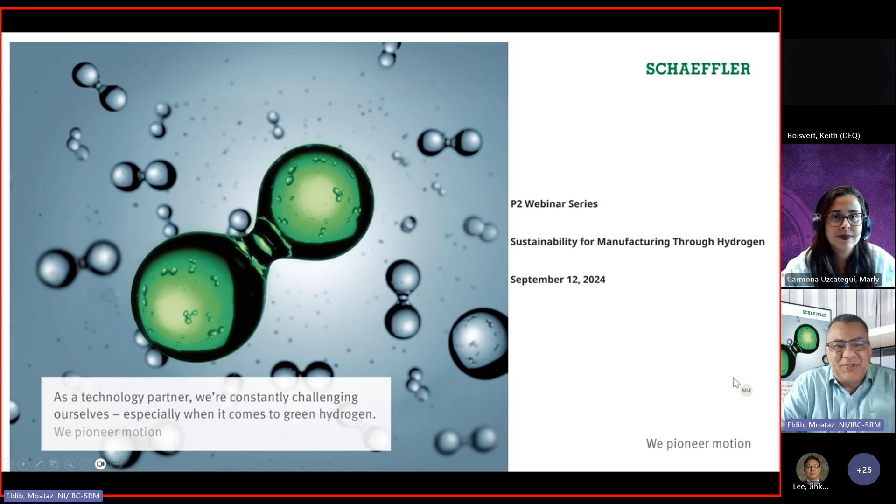All right. Yeah, thank you for the introduction and the opportunity to present. So I'll get right into the presentation. We'll start with a little bit of an overview of Schaeffler and then look at specifically electrolyzer technology, as well as the hydrogen market and federal policy, and then pathways to sustainability, along with maybe three example projects that can prompt discussions and give you some ideas on how hydrogen can be implemented in manufacturing operations to reach sustainability goals, along with some recommendations and high-level suggestions on engaging in projects.

So to start, Schaeffler is a global company that's been in business for over 75 years, headquartered in Germany, and our product lines are in automotive and industrial components. We've got over 83,000 employees worldwide with locations around the world, including our industrial headquarters in Fort Mill, South Carolina, and our automotive division in Wooster, Ohio. Our products are in just about everything that moves. Mobility is the core element of the product lines, from on-road and off-road vehicles to aerospace to the wind energy segment. Our products are present in many different applications.

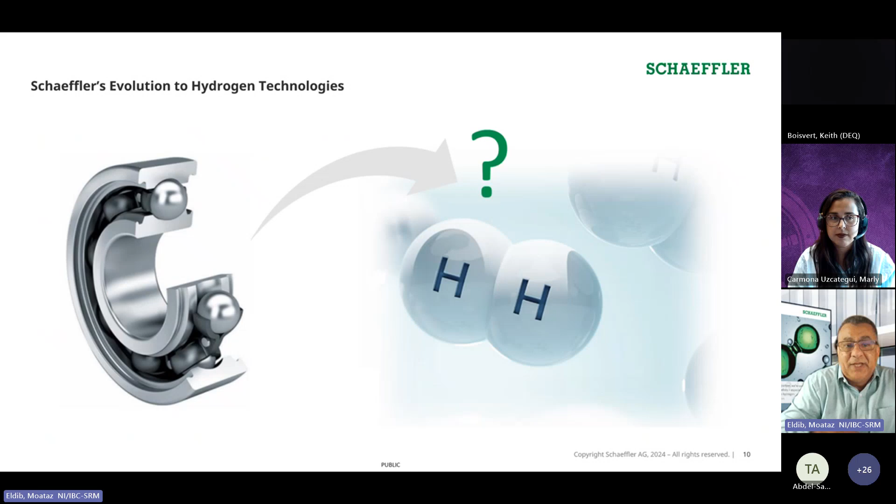So if you're not familiar with Schaeffler, or if you are, Schaeffler is a bearing company. So how does a bearing industrial and automotive company get into hydrogen technologies? Well, as I said, motion is our connecting element between our product lines. Whether it's guiding motion, driving, energizing and sustaining motion, our product lines are organized in a way that we can build upon our core competencies and our expertise to create valuable solutions for our customers.

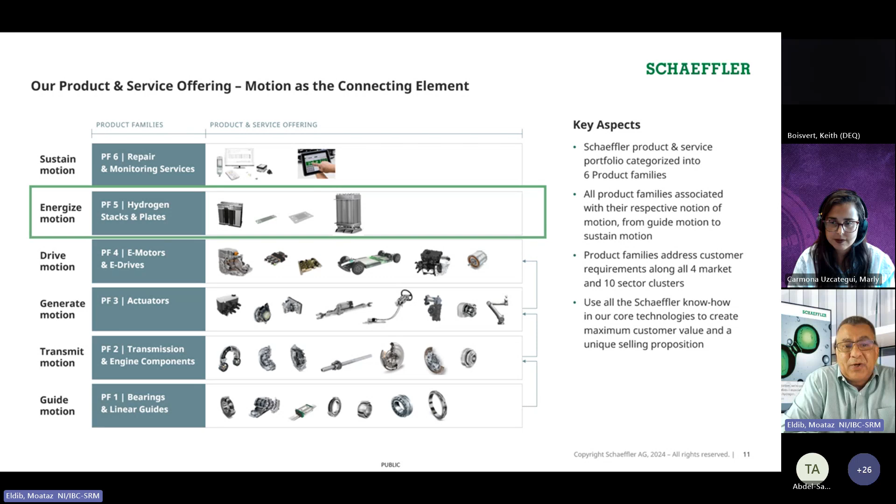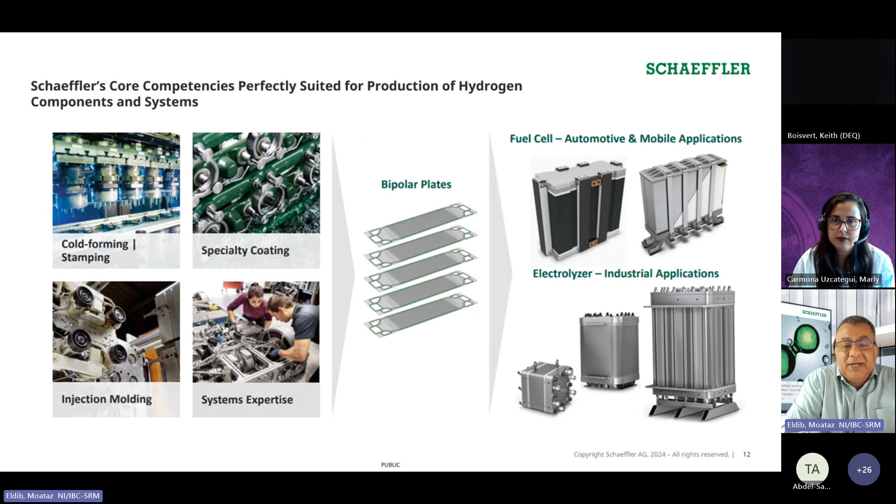Under the Energize Motion product family, we've got our hydrogen fuel cells, hydrogen electrolyzer, and our bipolar plate business. And that business is really well suited to the core competencies of Schaeffler, where we are very good at cold forming and stamping metal, highly engineered specialty coatings, injection molding for gaskets and seals, and complex system expertise. Those are the competencies that make us very well suited to be involved in the hydrogen industry through our bipolar plate manufacturing. The bipolar plate is the core component of a hydrogen fuel cell or an electrolyzer, and we can make those products with a high level of precision and quality, and at very high volume, which are needed for the hydrogen industry.

So maybe a little bit specifically about electrolyzers. The electrolyzer is a device that takes in water and uses electricity to separate the water into hydrogen and oxygen. In the market today, there are three core technologies that are readily available commercially: alkaline, PEM or proton exchange membrane, and solid oxide electrolyzers. PEM is where Schaeffler is at the moment, where our product line is.

But we'll start with alkaline, which is a very mature technology that's been around since the 1850s, and it has some definite benefits. It is typically attached to a hydroelectric dam to produce a lot of hydrogen, where it's got a very stable electrical input from the grid. So it's a mature technology that's been around for quite a while, but it does have some disadvantages: a large footprint, low dynamic range tolerance, long startup times, and maybe a bit lower hydrogen purity than some of the other solutions.

Moving to the PEM, which was a more recent development trying to solve some of the challenges with the alkaline electrolyzer, where you want to get a more compact footprint and you want to be able to operate with a more dynamic range of electrical input. So this is a technology that's really well suited to connection to renewable energy, where it may be a bit more unpredictable or variable input. So the PEM technology can really tolerate that and still have a good level of performance and efficiency.

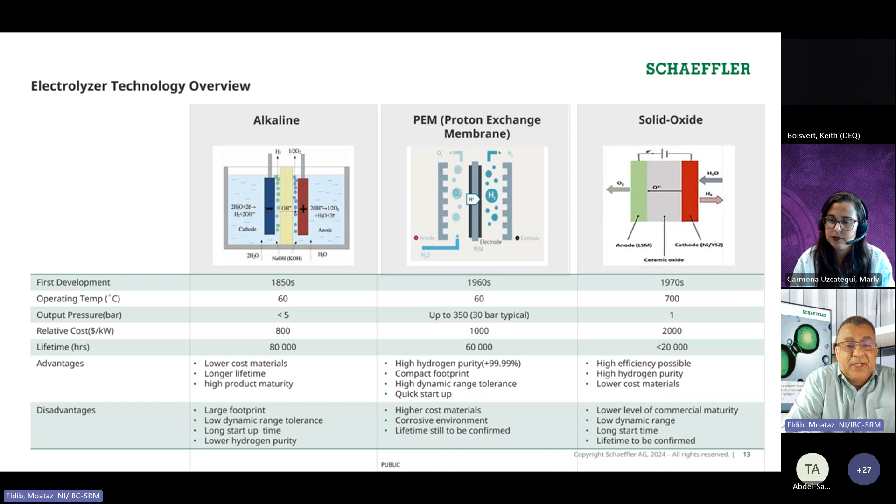So all three technologies have the same basic operating principle, where you have an anode and a cathode. You've got a separator or a medium in the middle with a catalyst, and you have electricity input, and the output is hydrogen and oxygen. So those operating conditions, whether it's temperature or pressure, as well as the current density and electricity input, are all the different characteristics of the system that would make them appropriate for one application or another. But typically in the United States and in most global installations, the alkaline or the PEM electrolyzer are the dominant technologies.

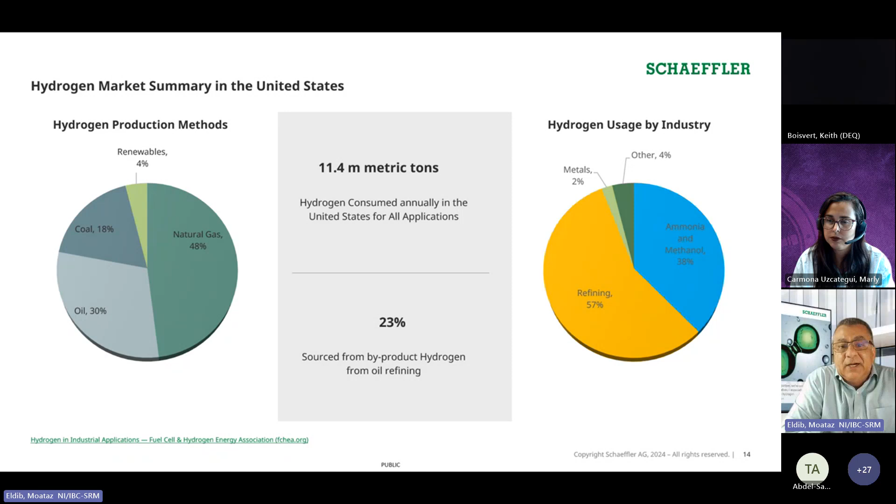So looking at the hydrogen market in the United States, there is 11.4 million metric tons of hydrogen produced and consumed annually across a variety of applications. And most of that hydrogen is produced from fossil fuel or carbon-intense sources. Only about 4% of the hydrogen produced in the United States is coming from renewables, so there's a lot of potential to decarbonize the hydrogen supply chain. Across industries, hydrogen is used primarily in oil refining, typically to desulfurize diesel and gasoline, as well as in ammonia and methanol production. There are some applications in metal processing and some others such as transportation.

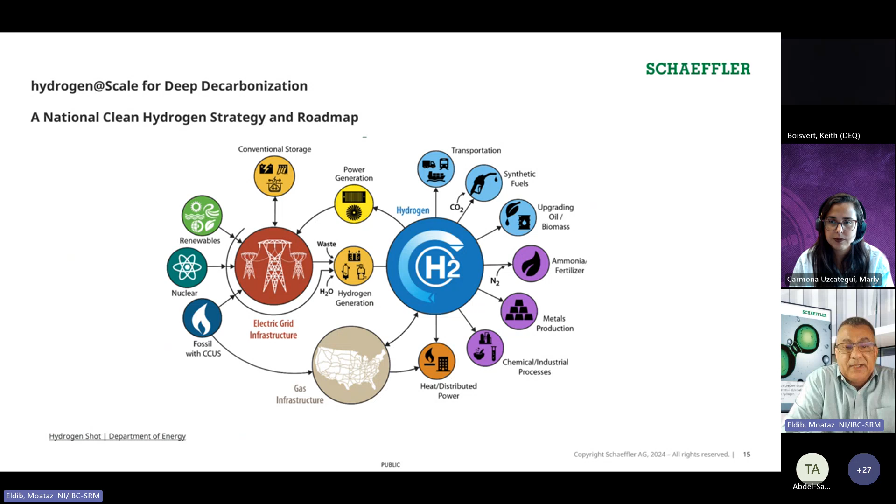And hydrogen is a very versatile element. It can be an energy carrier, it can be a fuel. And what this is showing as part of a national clean hydrogen strategy and roadmap is that there are a lot of different applications for hydrogen and a lot of different pathways for hydrogen to be generated, and it can be from renewables, from some fossil fuel sources, and utilizing the existing grid and infrastructure that we have today. So that versatility can give us multiple pathways to decarbonize.

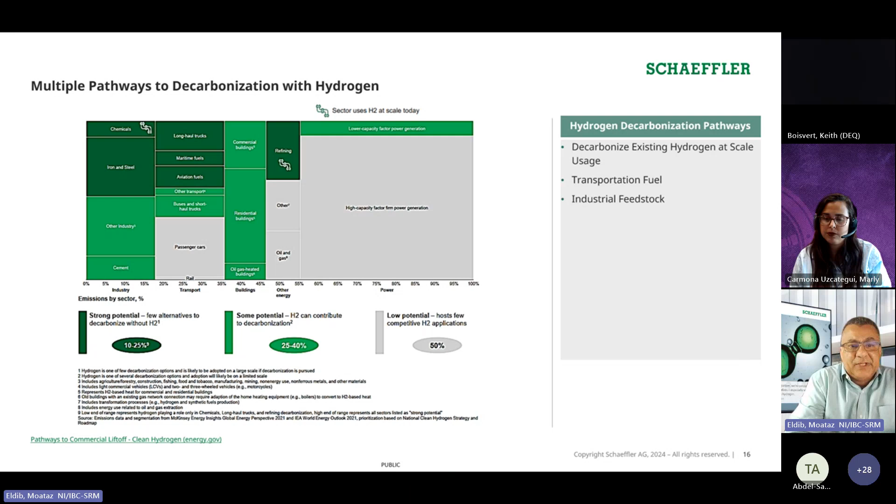So whether we are decarbonizing existing hydrogen production at scale, using it as a transportation fuel to replace fossil fuels, or as an industrial feedstock, we've got opportunities to decarbonize. This graphic is showing where there is higher potential for hydrogen to decarbonize, and where hydrogen is being used at scale today. In the chemical and refining industry, it's really being used at scale, and we've got a good possibility for hydrogen to decarbonize heavy transportation, some rail, and some light commercial vehicles, as well as iron and steel and cement production. Some of the other applications may be a little less promising or not as easily implemented with hydrogen solutions today, but there are easier pathways for hydrogen to decarbonize the industries today.

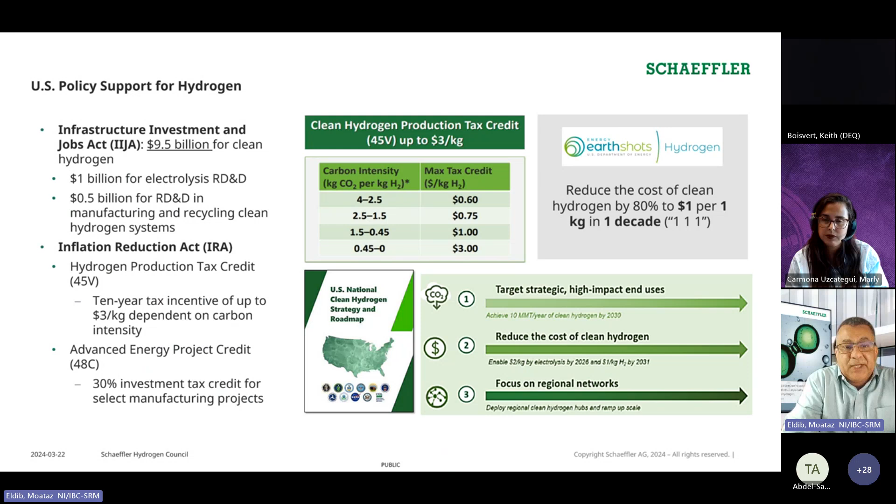And to support those strategies, we've got a number of federal programs. We've got the Infrastructure Investment and Jobs Act. We've got the Inflation Reduction Act, where the federal government is supporting this clean hydrogen strategy through research and development grants, funding for projects through tax credits or grants, and also production tax credits. The target is reaching $1 per kilogram by 2031. And reaching the decarbonization goals of the United States requires an additional 10 million metric tons of hydrogen per year, that is green hydrogen, mainly produced by electrolyzers. So it's a very ambitious program where the federal government has really taken a lot of aggressive action to support it.

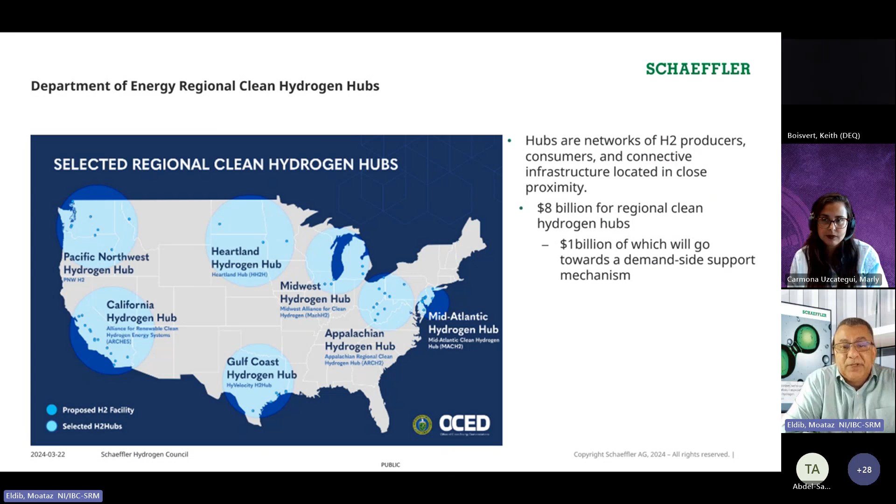The other aspect of the support is these hydrogen hubs, where there are networks of hydrogen producers and consumers spread throughout the country to encourage the development of projects, as well as matchmake with the people that are demanding hydrogen and putting them together with the hydrogen sources.

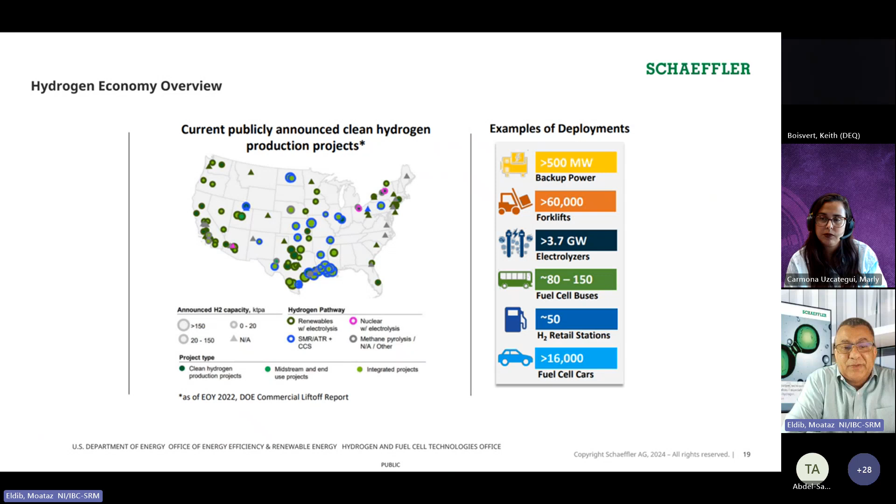So already, and this is a bit dated, but as of the end of 2022, based on the Department of Energy Commercial Liftoff Report, there are more than 3 gigawatts of electrolyzer projects that have been installed or about to be commissioned in the United States, as well as 60,000 fuel cell powered forklifts, a few buses on the road, as well as some cars, but really the electrolyzer and the forklift markets seem to be the strongest in hydrogen so far.

So on the topic of sustainability, tying it together with some of the initiatives that a lot of companies are going through, the ESG regulations, and trying to measure and monitor the greenhouse gas emissions that a company has because of their operations. This is usually through the methodology of measuring the scope 1, 2, and 3. The scope 1 direct emissions, whether it's at the facility or transportation, and then the scope 2, the indirect energy purchases that a company does.

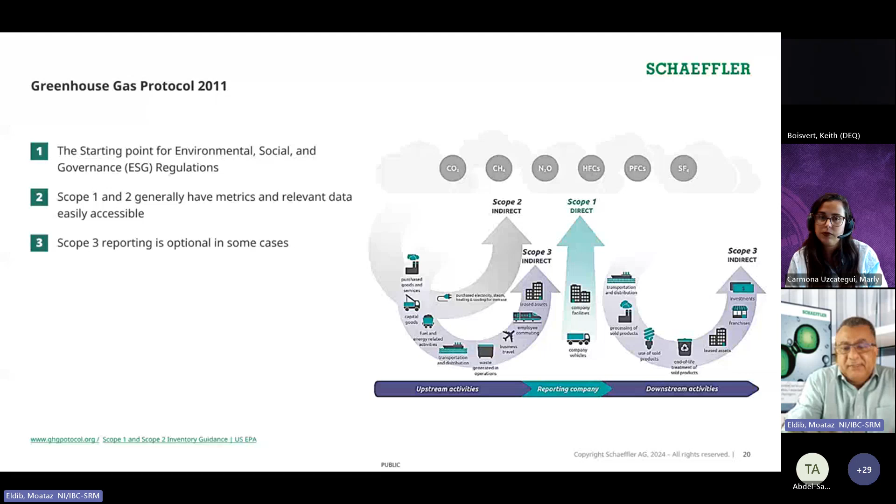So this is really a good starting point for starting to think about how sustainability initiatives can be implemented and how hydrogen can be used to eliminate some of those carbon emissions. So like a lot of companies, Schaeffler has some very aggressive and ambitious goals toward climate neutrality. So we've got a sustainability report that's available, and we have a goal of being climate neutral by 2040. And there's three main pillars of that strategy.

One is sustainable materials. So part of that is committing to being an off-taker for green steel. So hydrogen is a big enabler for making green steel, so we can provide the hydrogen technology for some of our vendors to implement some of these initiatives, and then we can commit to using this green steel in our own processes. So we use a lot of steel in our products. So this can be a big step toward that sustainability goal.

And then in our production, we've got 46 plants around the world that are using 100% green electricity, as well as trying to have goals to reduce our water consumption. And then in our product lines, besides the hydrogen technology, we are involved in the electrification of the automotive industry through some of our product lines, and also implementing innovations in our bearing product through friction reduction and other innovations.

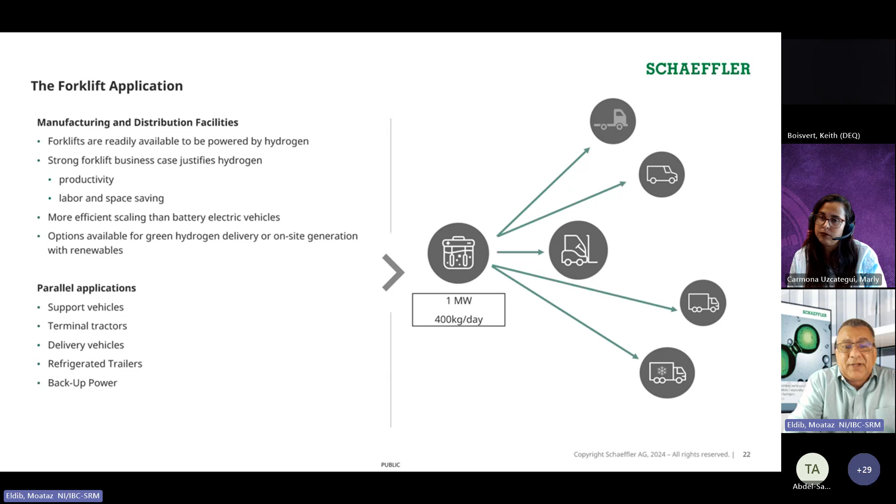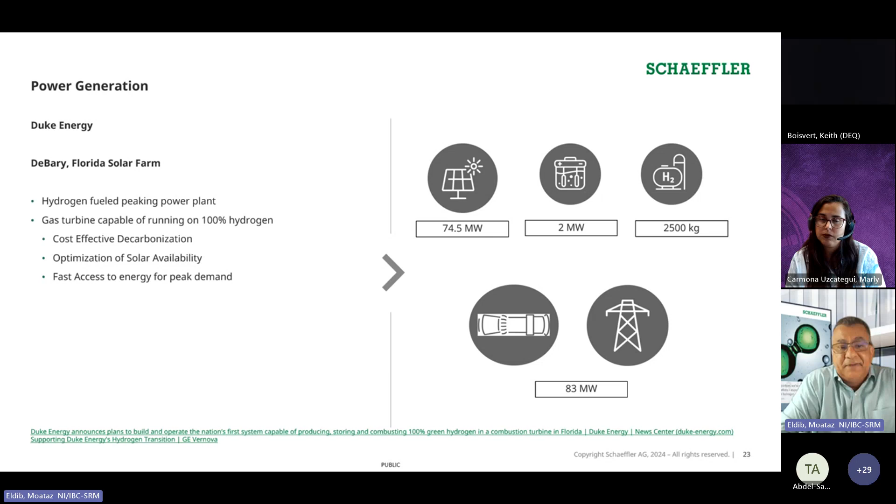So, having solar energy maybe tied to a battery is a good application, but maybe the battery is not as responsive. And in this application, what they can do is take the 2 megawatts of electricity from the solar farm and generate hydrogen. They can store 2,500 kilograms and then use it in one of their gas turbines and put 83 megawatts back onto the grid. So this can cycle very quickly because the hydrogen is there and available. And it is a way to decarbonize and still maintain the integrity of the application and the benefits of the fast peaking power.

And then one of our own applications at Schaeffler: we are installing and commissioning our own system in Schweinfurt, Germany, where we have a 1 megawatt electrolyzer generating about 400 kilograms of hydrogen per day. It's tied to renewable energy that's available from the local grid, and we can store that hydrogen in a buffer tank and then make it available to our heat treatment furnace

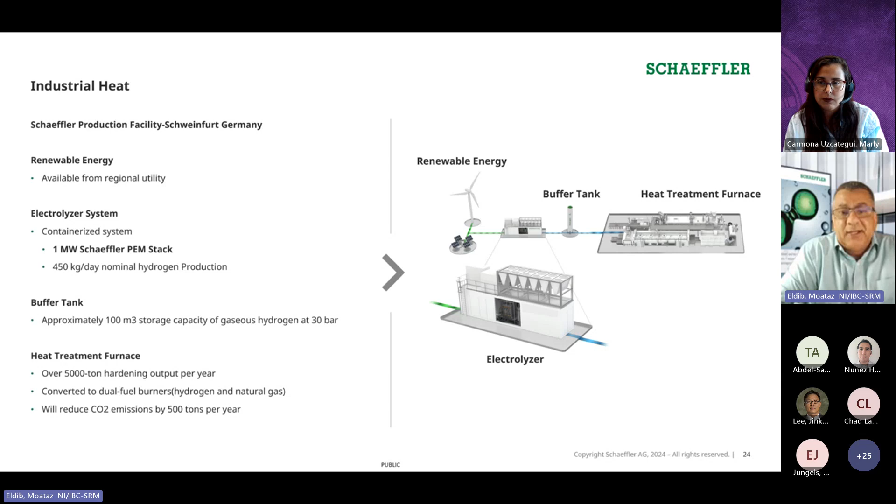that is a hybrid furnace that can be powered by natural gas or hydrogen. So when it is using the hydrogen, we are eliminating about 500 tons per year of CO2 emissions. So this is a chance for us to use our own technology, showcase it, and offer it as a solution for decarbonization to one of our own sites.

So I guess a few key steps when thinking about hydrogen and decarbonization in manufacturing. It's really important to understand scope emissions. You can't change what you can't measure. So having a comprehensive assessment to establish a baseline is a key step. You really need to know what the sources of emissions are and where you can start thinking about reductions and implementing the technology. And then aligning stakeholders and getting buy-in early.

A lot of the corporate sustainability goals are requiring a collective effort across stakeholder functions in the company. So getting people aligned and understanding how to implement these projects early on is a key step. There are ambitious federal programs with funding and complementary state and local funding. This is really highlighting the economic and environmental benefits of hydrogen as a pathway to decarbonization. So those programs are available and can be fully taken advantage of.